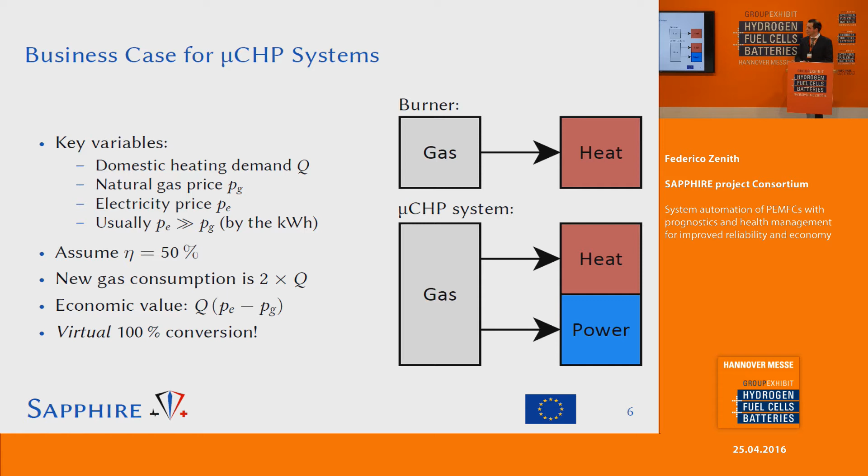You start here from the first case when you have a normal natural gas burner that most people in Germany and other countries have. You have a demand for heat, and you fulfill that demand with energy from gas. In the micro CHP system, you still fulfill the same demand for heat, but use a converter that has an efficiency of about 50%, which means you increase your consumption of gas, in fact, and then you produce electrical power. That electrical power you can sell back to the grid, and since the price of electricity is higher than gas, you can make money out of that, and that's where your business case is.

This is what a typical micro CHP unit looks like. You start from the left with water and natural gas from the grid. They go through a fuel processor. They are reformed by heat and other reactions into hydrogen and CO2. There are some trace amounts of CO that are dangerous for the fuel cell. We add some air bleed to remove that.

Then the hydrogen goes through the fuel cell, produces electricity, and then what is left of the hydrogen is burned in order to generate the heat that again fuels the fuel processor. Then all the exhaust is sent to a cogenerator on the right that collects all the heat from the system and provides the heat that the house requires. Then the produced electricity is normally sold back to the net. Typical size is about 1 kilowatt in heat, 1 kilowatt in electricity.

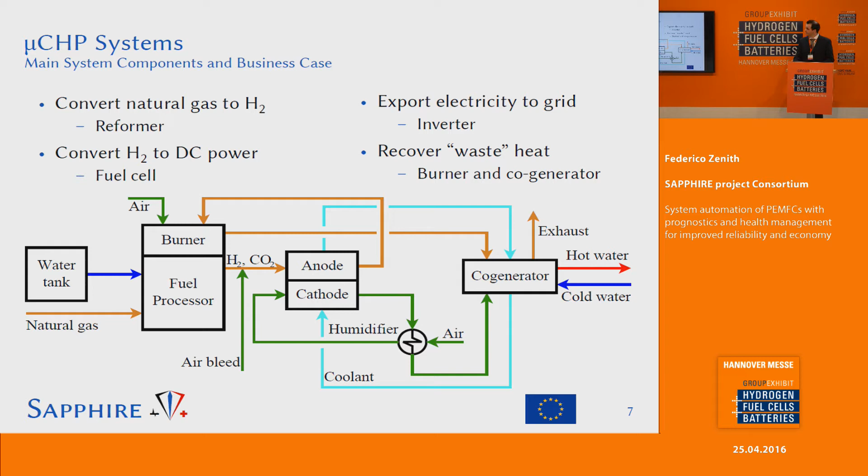Some definitions about prognostics, because a constant is that people don't see much difference between diagnostics and prognostics. Diagnostics means, in brief, to explain the present based on the past, and prognostics is predicting the future based on the present. Generally, you first run diagnostics to understand the condition your system is in, and then you run prognostics in order to understand how long the system will run in the future. This is something that is very common in aerospace, also in mechanical engineering, and in general wherever you have expensive systems that you want to maintain in a timely fashion.

So oil and gas, for example, is an area where they're applying prognostics recently, and also fuel cells, of course, which is what we want to do in this project.

Okay, so for the diagnostic part, there are many ways a fuel cell can degrade. Some are reversible, some are irreversible. For the reversible part, you can have too much water, you can have too little water. This is, of course, relevant for PEM fuel cells, as you have other modes of degradation. You can have poisoning by carbon monoxide. Irreversible degradation is typically due to degradation in the catalyst, by particle aggregation or loss of support, or by membrane damage. And all these degradation modes have one thing in common.

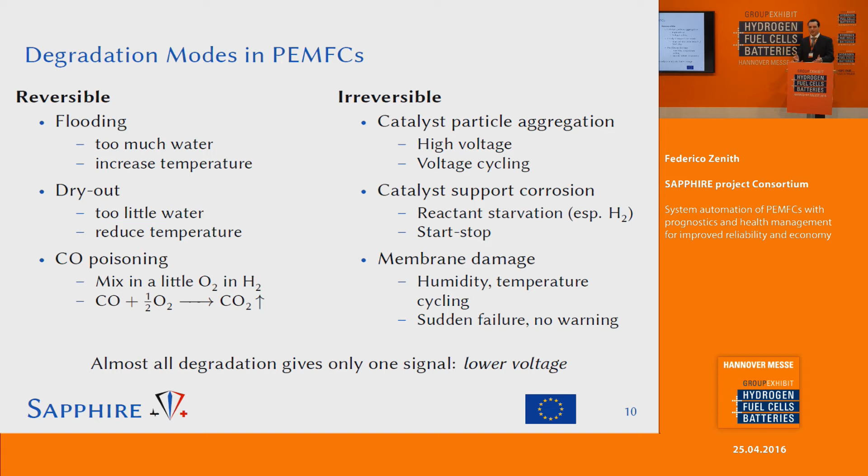The only thing you normally read in a system is that the voltage is decreasing. So you cannot really immediately understand from the voltage what the problem is. I sometimes compare this to a crying baby. The fuel cell is giving one signal, and just like a crying baby it is not really telling you what the problem is. You have to figure it out for yourself, and that's what you want to do.

One way to figure out what the problem is, is to run electrochemical impedance spectroscopy, or EIS. This is very popular in academia because it gives you a wealth of information, but it's not something you can commercialize because the equipment for EIS is generally more expensive than a micro CHP system. So if economy has to make sense, you would rather buy a second micro CHP system. So there are some projects like Decode, which is another EU project, that aim at including EIS in converters, but they're not commercial yet. But until they're commercial, we have to make do with whatever we have.

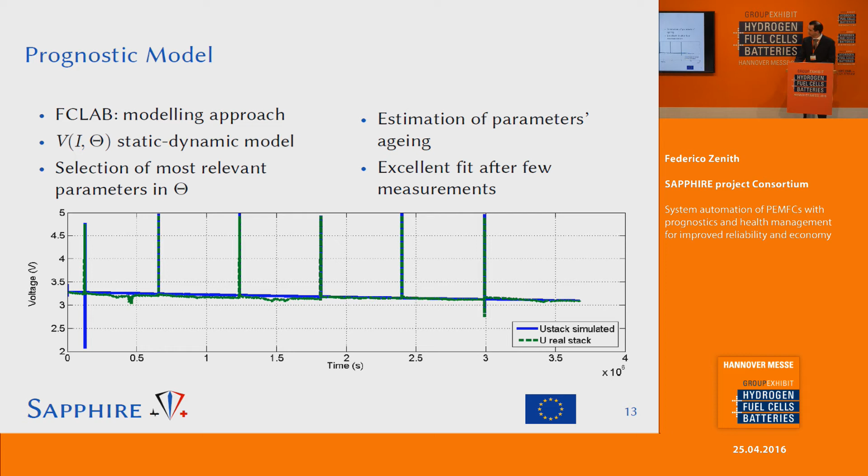For the control, we developed a number of control techniques. One I like especially is the control to adapt the air bleed level. Normally you have a certain percentage of air bleed coming into the anode side of the stack together with hydrogen in order to remove the CO. But this is constant and normally set for the worst case, so it's a bit of a waste. And the problem is you cannot really measure the CO interactively because it's very expensive. Again, it's a chemical measurement.

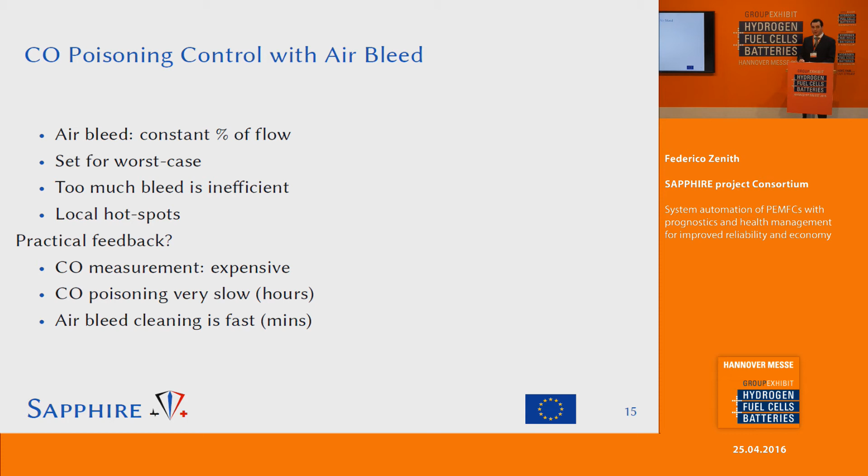And at the same time, the dynamics of CO poisoning are very slow. They take several hours to complete. And you cannot really tell when there is CO poisoning because the effects are not immediate. What is immediate, though, is the effect of air bleed when you increase it. If you have CO poisoning and you add some air, you immediately see the voltage increase. And that's what we exploited.

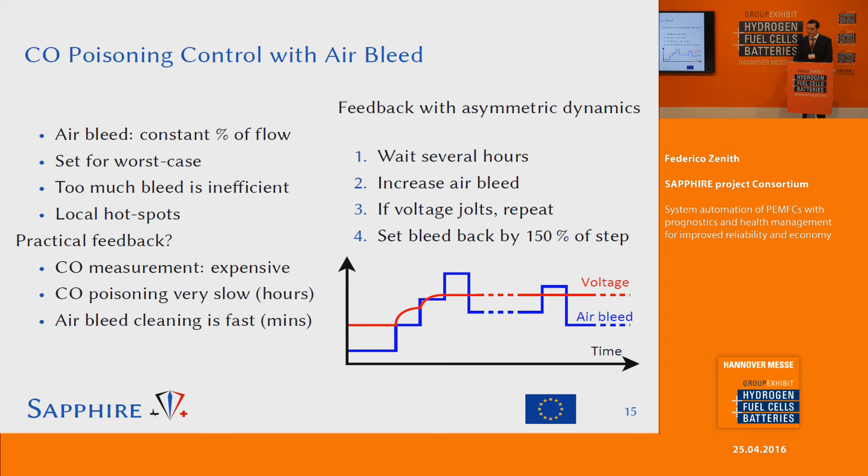So the way it works is that we increase the air bleed a bit, then we see the voltage increasing, and as long as the voltage is increasing, we increase the air bleed, and then we stop and we gradually reduce. We have tested this, and we can say it has been demonstrated over several thousand hours, and it works, with some problems that are going to be sorted out soon.

Another problem is the humidity. We normally want to run a slightly higher than 100% humidity in a fuel cell, but the problem is that in order for this to work, we have to keep a very stable temperature. And if the temperature deviates a bit, you can have problems with too many droplets forming, and this causes an unstable voltage, or no droplets at all.

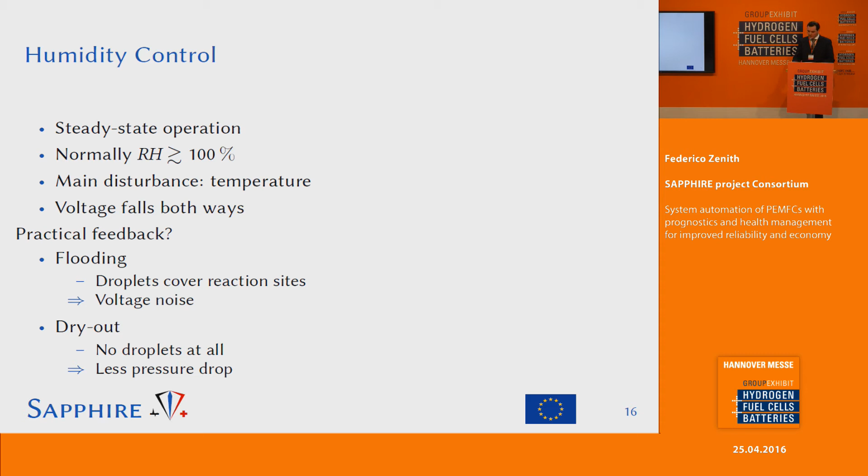And if there's no droplets, then one thing you notice is that the pressure drop reduces rapidly and becomes very steady. So in order to detect these conditions, in the case of flooding, we look at the voltage, and we see oscillations and a high standard deviation. We deduce it's a problem with flooding. And if we see the pressure drop becomes very steady and not noisy, then we deduce it's a condition of dry out. This has also been demonstrated, but it's not such a common condition, so it's mostly demonstrated in laboratory.

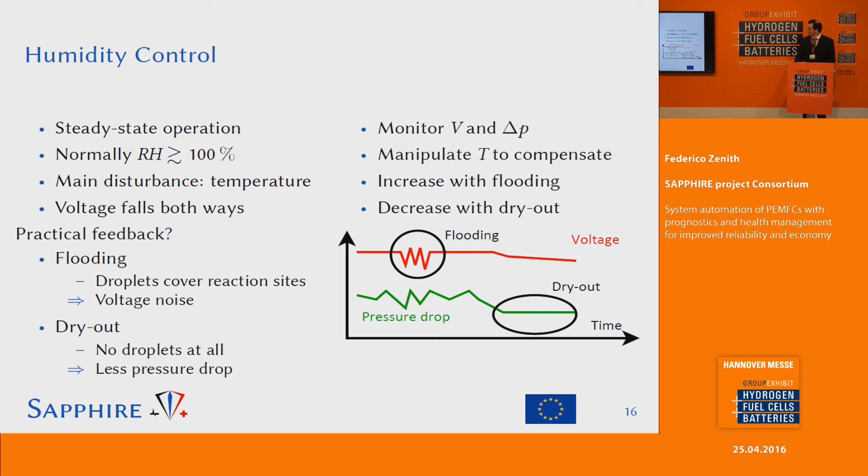A concept we developed, we could not test it unfortunately, was the ability of monitoring the lambda, the reactant excess ratio in a fuel cell. And the motivation for this is that if you run a micro-CHP system efficiently, you want to run it at a very low lambda, fairly close to 1. But if you go below 1, you run into hydrogen starvation, and within seconds, your stack will be degraded and useless. So you want to have a very precise monitoring of this. Again, you don't want to install a composition measurement, which is expensive.

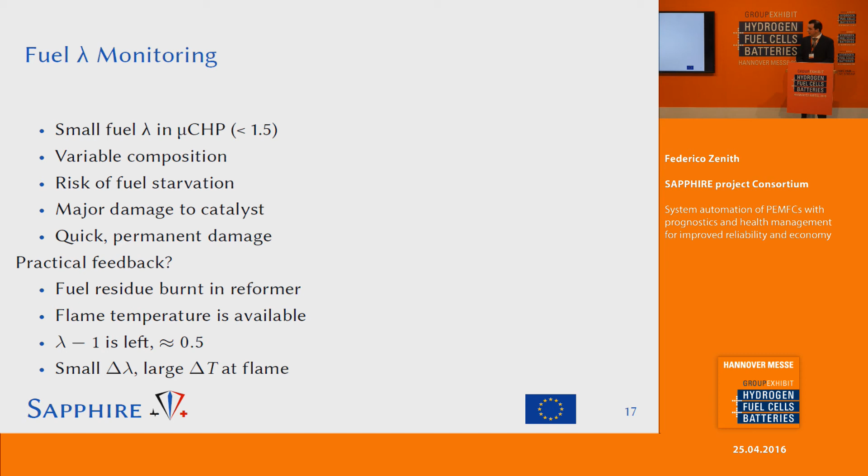So in order to measure that, we found out since we have a burner downstream of the anode, the fuel cell effluent is burned, and the temperature of the flame is a very good indicator. So you have a very clear indication that you might run into starvation. And then, of course, if you see the temperature of the flame falls down, the first thing you can do is immediately to reduce current to avoid immediate damage to the stack.

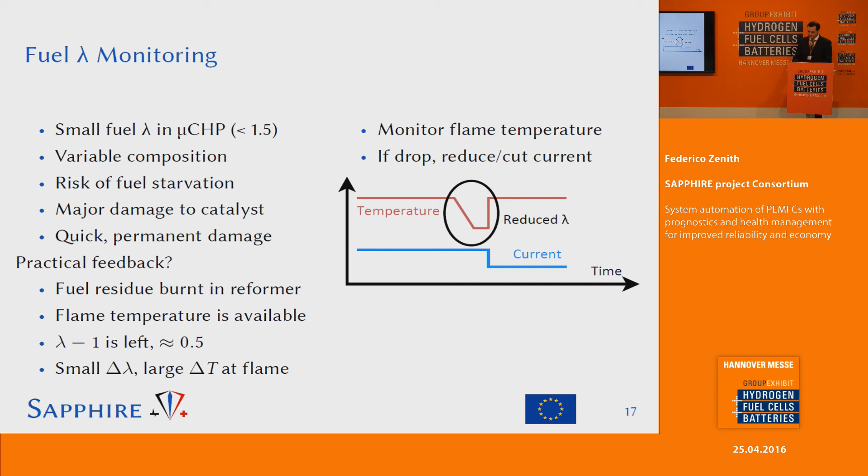Implementing prognostics in control is not immediately obvious because if you just try to optimize the RUL, the residual useful life of the system, and give the optimization problem to a computer, the computer will give you the trivial answer: don't use the system. And of course, that's not the answer we want. So one important part was defining a good formula to optimize. For example, in words we can say we want to optimize the work we get done or the money we get out of the system over its lifetime, not just increasing the lifetime per se.

One problem we encountered is that we don't really have that many variables to optimize for. For example, temperature is very constrained, current is often given, but we are going to start a new project next week actually. It's called Giant Leap, very similar setup, and we'll apply this to automotive, and that we expect to be much more fruitful.

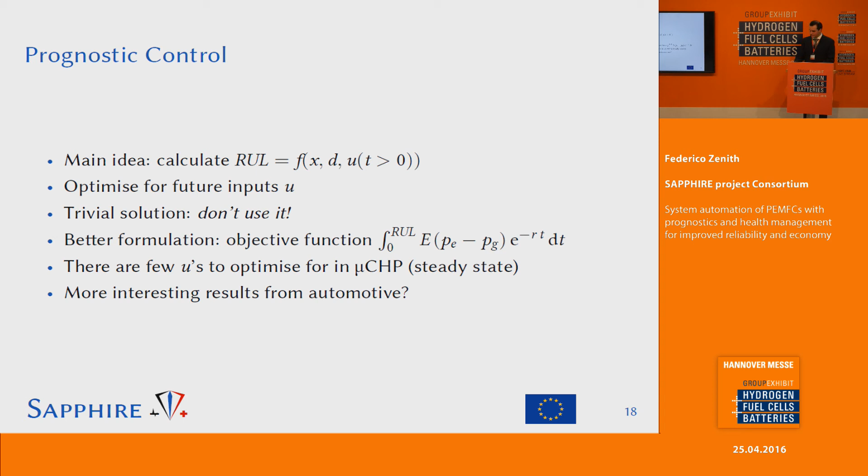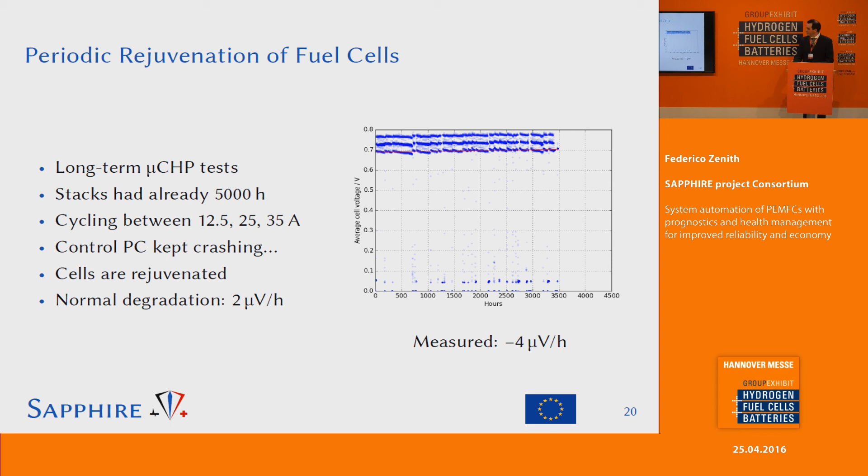Finally, on rejuvenation, we found some very interesting results, almost by mistake. This is the actual data from a 4,500 hours demonstration. Normally, the degradation rate you measure is 2 microvolts per hour per cell, and we measure 0.2, which is actually the world record as the lowest degradation. And the reason was the system kept crashing. So we found out that if you restart the system often, you improve the degradation rate. And the second system, actually, we had the rejuvenation of 4 microvolts per hour per cell. So the system was actually improving over 3,000 hours.

Finally, what are we going to do with this? We have developed 2 patents. One is already filed, and another one for data-driven prognostics is going to be filed soon, and so I cannot tell you anything about it. Dantherm Power is probably going to implement this improved control system in their products sometime next year or later. Software will probably be made available on our website next month as the project is concluded. And ZSW will develop new stack designs from the results.

So, conclusions. We extended the EIS model and found appropriate prognostic variables. We have developed several precise and reliable prognostic models. We developed control loops for carbon monoxide poisoning, humidity, etc. And all this was with very cheap and minor modifications to the system. And most importantly, we found out that a lot of the irreversible degradation in fuel cells is not as irreversible as we previously thought. So we have to study more.